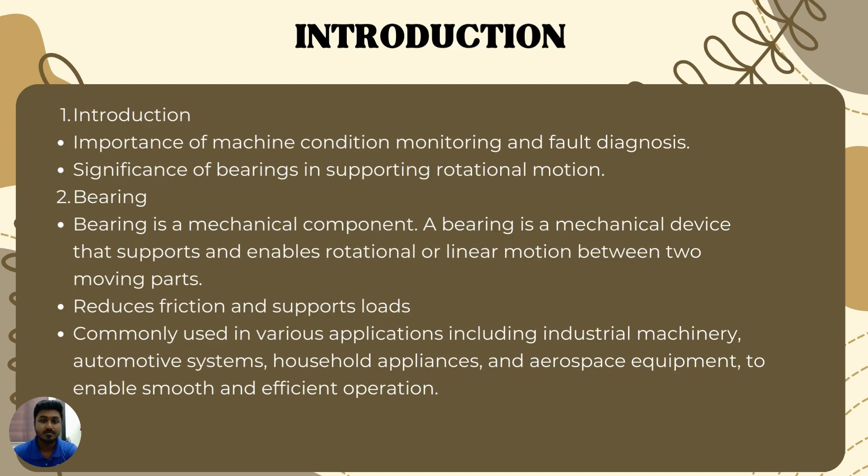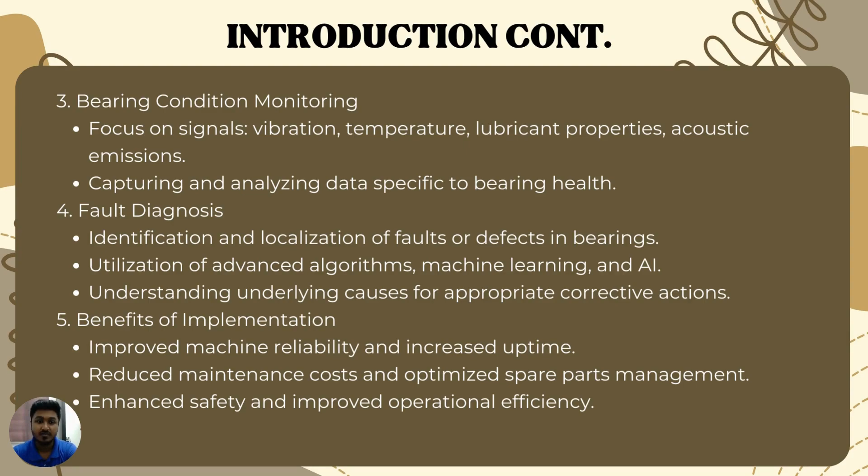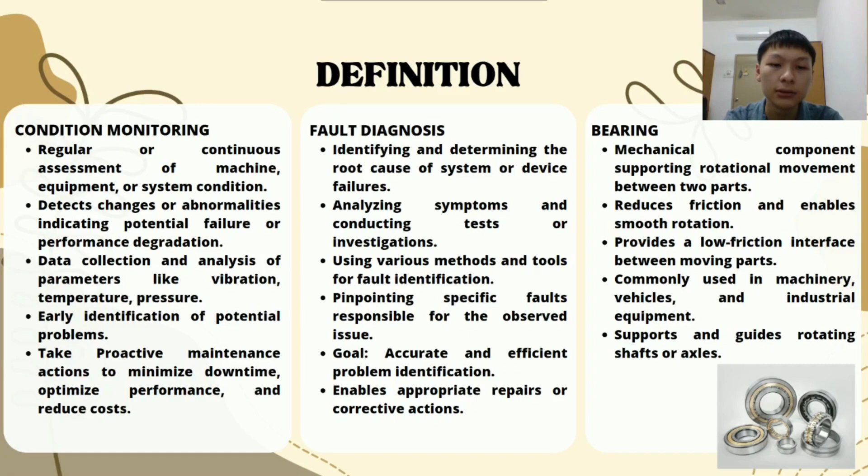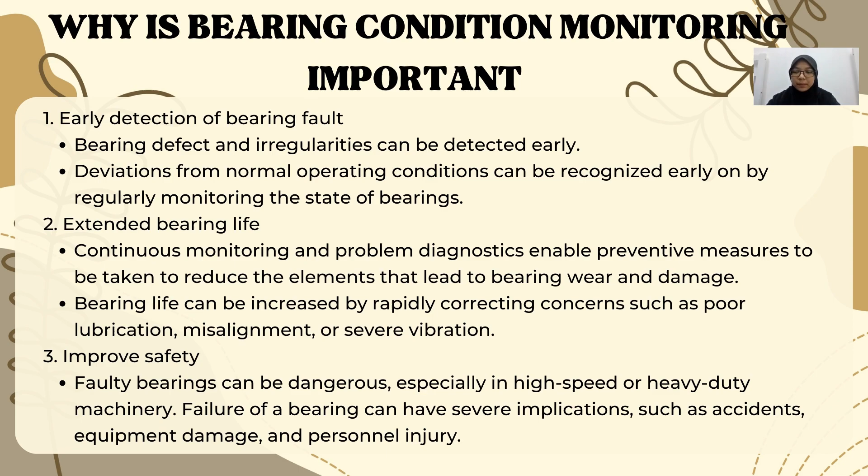Next, improve safety. Faulty bearings can be dangerous, especially in high speed or heavy duty machinery. Failure of a bearing can have severe implications such as accidents, equipment damage, and personnel injury. Condition monitoring also helps in cost reduction. By recognizing bearing defects early on, critical maintenance may be performed in a controlled way, preventing catastrophic failure and costly restoration.

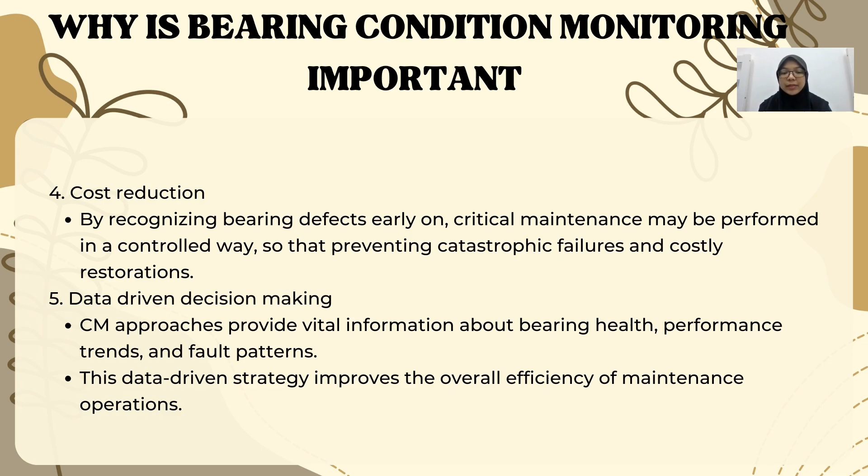Lastly, data-driven decision making. Condition monitoring provides vital information about bearing health, performance trends, and fault patterns. This data-driven strategy improves the overall efficiency of maintenance operation.

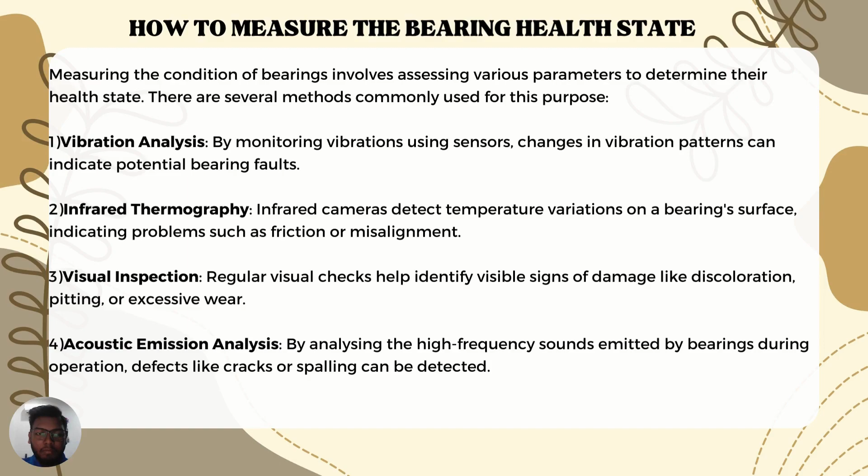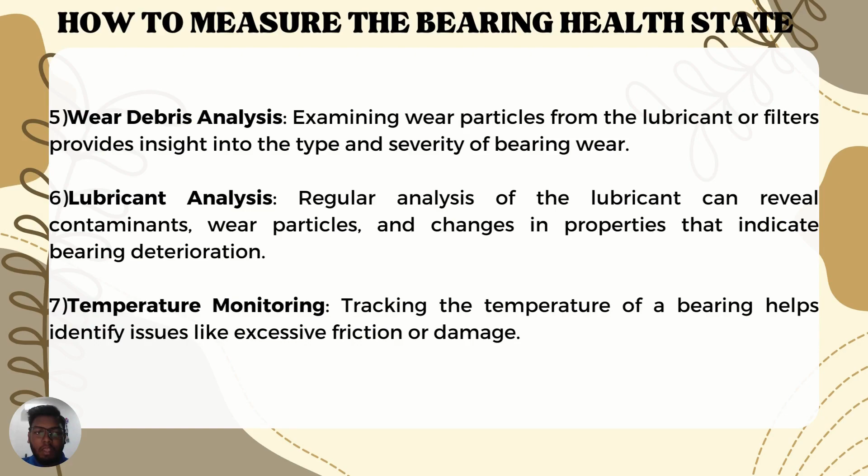The seventh method will be temperature monitoring. Tracking the temperature of bearing helps identify issues like excessive friction or damage.

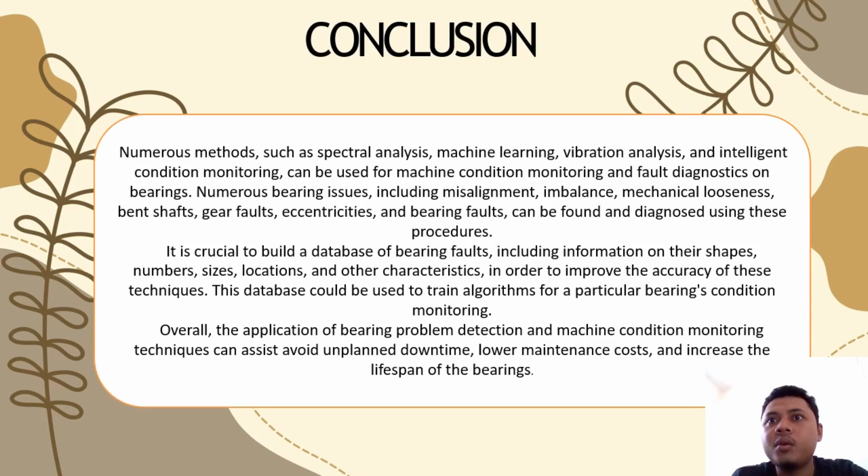It is crucial to build a database of bearing faults, including information on their shape, number, size, location, and other characteristics. In order to improve the accuracy of this technique, this database could be used to train algorithms for a particular bearing condition monitoring. Overall, the application of bearing problem detection and machine condition monitoring techniques can assist in avoiding unplanned downtime, lower maintenance costs, and increase the lifespan of the bearing.